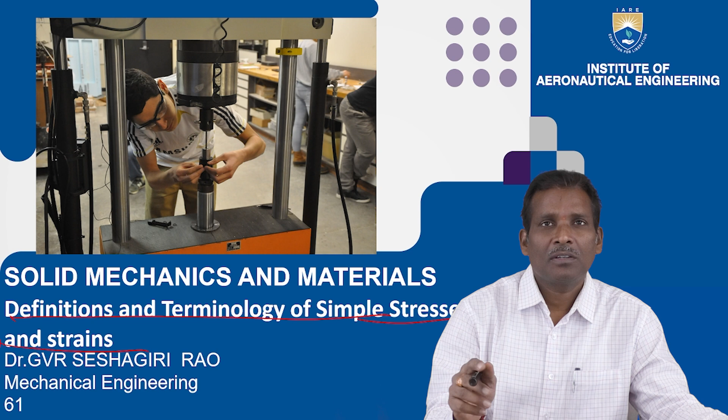In today's session, I want to discuss definitions and terminology. Some important definitions are important in every module, and some terminology related to topics are very, very important. So in this session, I want to discuss definitions and terminology of simple stresses and strains. First we will start from simple stresses and strains, then we will see other definitions and terminology of various topics. These definitions and terminology are very important while solving problems and deriving equations, so every student should know about them.

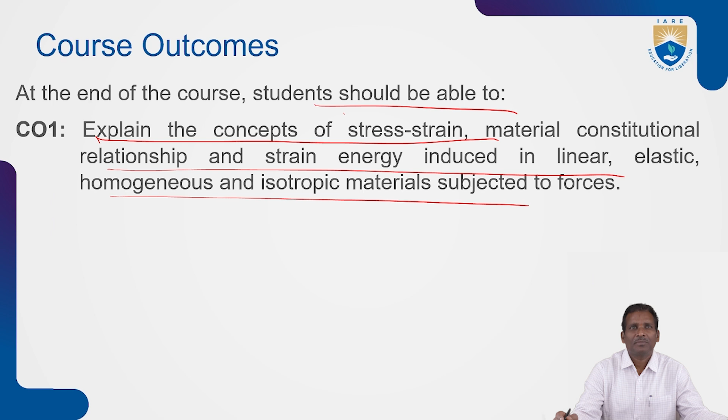So the course outcome is: at the end of the course, students should be able to explain the concepts of stress and strain, material constitutive relationships, and strain energy induced in linear, elastic, homogeneous, and isotropic materials subjected to forces. We have already covered all these topics. So after completion of this definition and terminology module, the student should be able to explain the concepts of stress and strain, and also the relationship related to strain energy induced in such materials.

See, first we will start from stress and strain. So define stress and strain - what do you mean by stress, what do you mean by strain? Later we will see the types of stresses and what is the relation between stress and strain, and how to write the relationship between elastic constants.

When an external force acts on a body, the body tends to undergo some deformation. Whenever the external force is acting on a body, the body tends to undergo some deformation due to this external load. Internally, the cohesion property between the molecules will be developed, so the body resists this deformation. This resistance by which the material of the body opposes the deformation is known as the strength of material - it can withstand that load, meaning the body opposes the deformation.

Within the elastic stage, the resisting force equals the applied load. This resisting force per unit area is called stress, or intensity of stress. So stress is equal to the applied load, that is force per unit area - resisting force upon area gives stress.

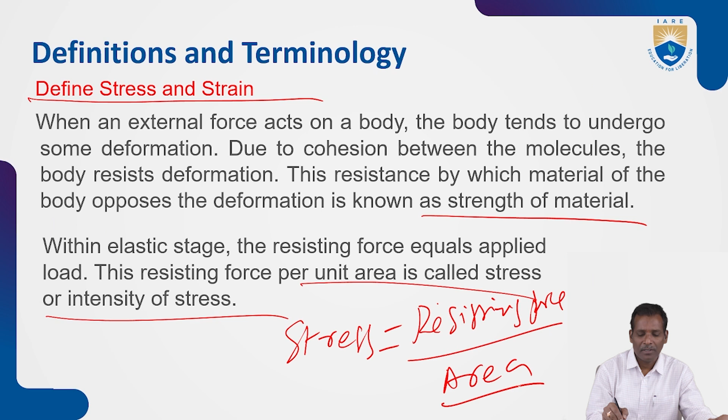So direct or normal stress is calculated using the following formula. You already know the applied load and original cross-sectional area resisting the force - that is called stress. Stress is equal to load upon A. So direct or normal stress can be calculated using this equation, load per area. Now let's calculate the units.

In SI units, force is expressed in newtons and area is expressed in meter square. Hence the unit of stress becomes Newton per meter square, because stress equals load per area. So load is in Newton, and area is in meter square or millimeter square, giving the unit as Newton per meter square or Newton per mm square.

Now you can write the units in pascals. 1 pascal is 1 Newton per meter square, and in centimeter square it becomes 10 to the power minus 4, or 10 to the minus 6 Newton per mm square. 1 megapascal is equal to 1 Newton per mm square. These are the very fundamental definitions of stress and its units. 1 megapascal, that is 1 into 10 to the power 6 Newton per meter square, is equal to 1 Newton - converting into mm square gives 1 Newton per mm square.

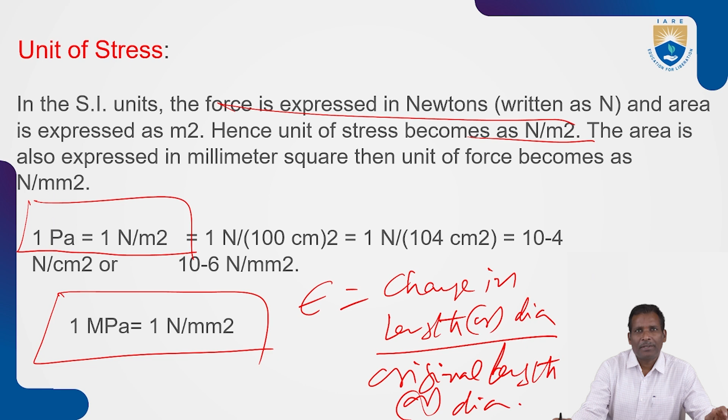Now let's differentiate tensile stress and tensile strain. The stress induced in a body when subjected to two equal and opposite pulls, as a result of which there is an increase in length, is known as tensile stress. The tensile stress acts normal to the area and it pulls on the area.

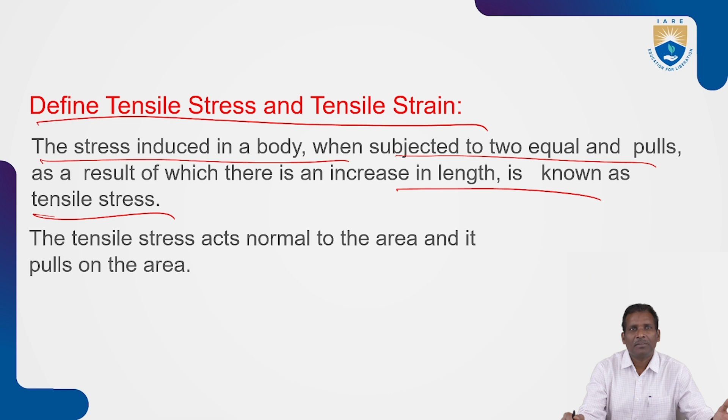See, whenever the component is subjected to tensile load, the load elongates the component. So this is after increased length - original length is L, and the increased length is delta L. So now you can write the strain equation: strain is equal to change in length by original length.

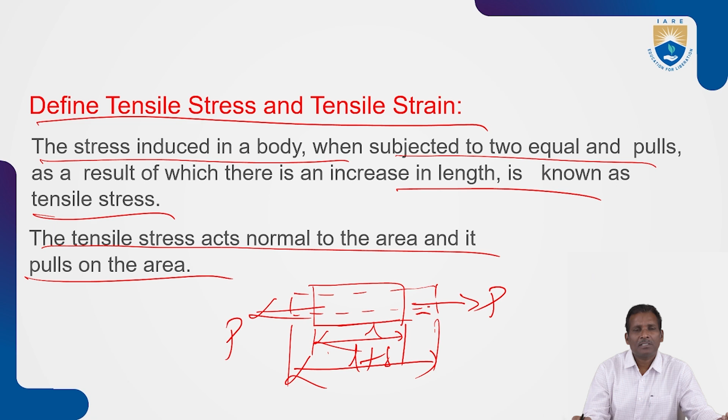See in this diagram, figure shown clearly. Resisting force - whenever the component is subject to tensile load P, some resisting force opposes. That is the strength of the material. Resisting force upon cross-sectional area gives tensile stress. So you can write stress is equal to load upon area.

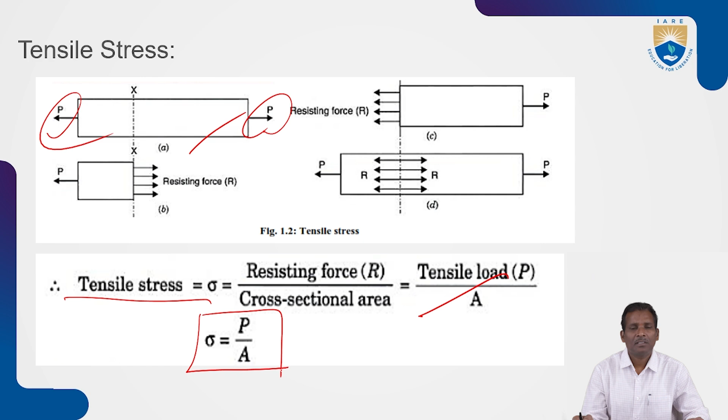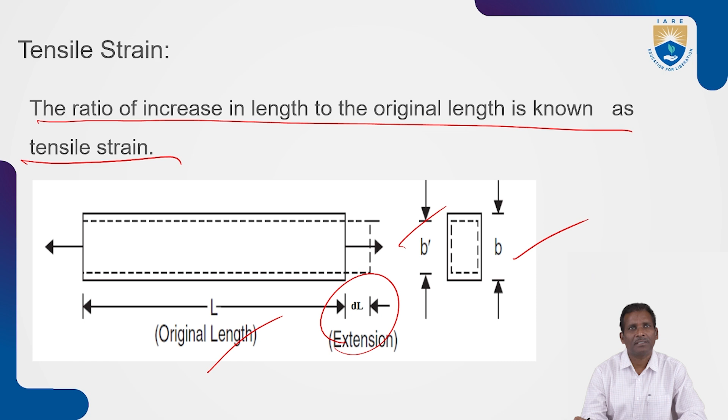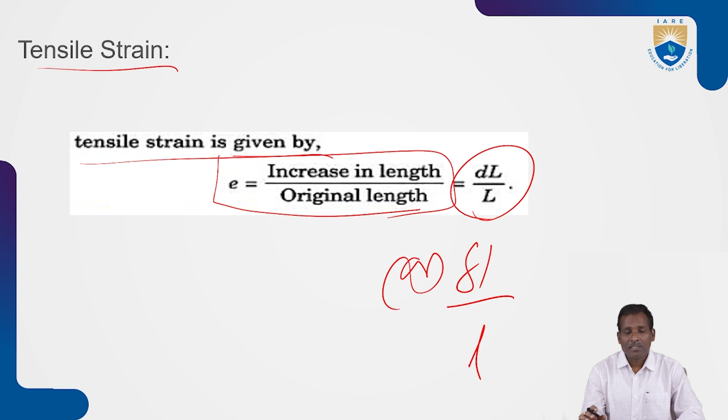So the ratio of increase in length to the original length is known as tensile strain. The original length is L, after deformation it is delta L or dL. Here also the width and depth change to B dash. So length increased and diameter decreased. Now tensile strain, you can write epsilon or E: increase in length by original length, that is dl by L or delta L by L. This is the definition of tensile stress and strain.

Next, what do you mean by compressive stress? The stress induced in a body when subjected to two equal and opposite forces, because of which there is a decrease in length of the body, is known as compressive stress. So the compressive stress acts normal to the area and it pushes on the area.

This is shown in this diagram. Two equal and opposite forces push, because of which there is a decrease in length of the body. So resistance is induced, shown here as the compressive stress. So you can write compressive stress is equal to compressive force by area. Sigma is equal to PC by area, compressive force by area.

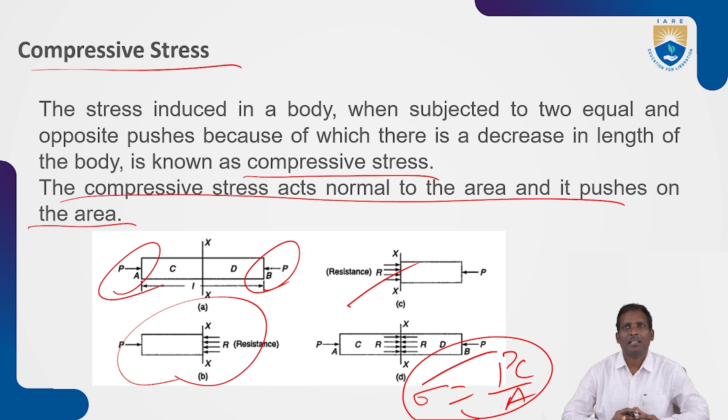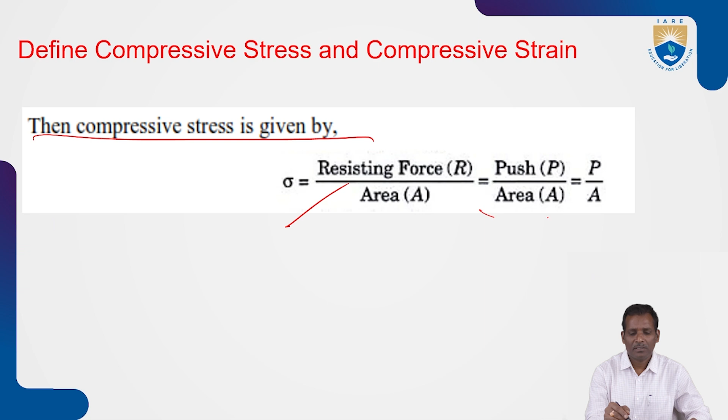So now define compressive stress and compressive strain. Compressive stress we have already discussed - whenever the stress is induced in a body subjected to two equal and opposite pushing forces, there is a decrease in length, not increase, unlike the tensile case where there is increase. So compressive stress is given by resisting force upon area, that is the push load by area.

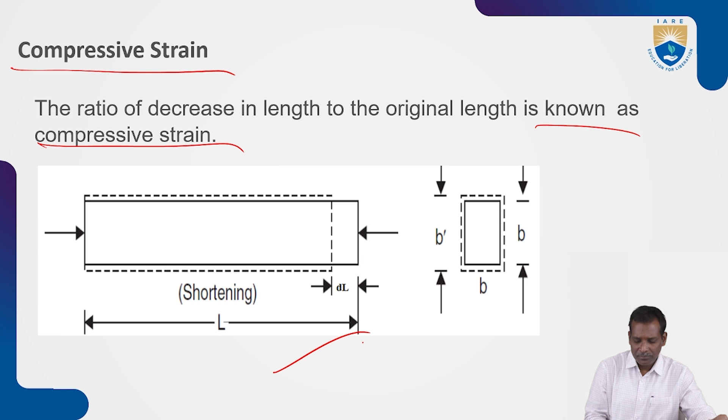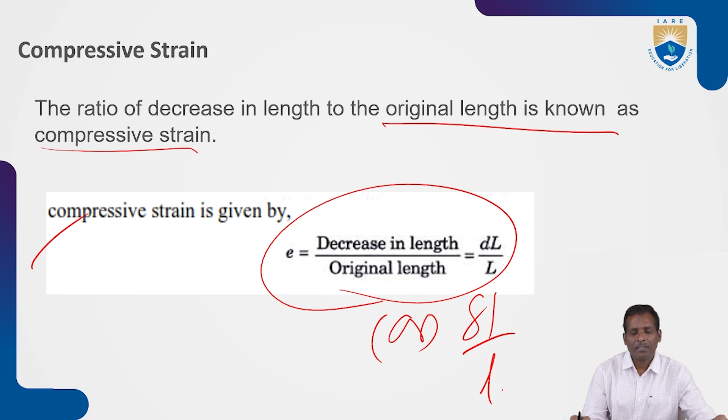So now the compressive strain: the ratio of decrease in length to the original length is known as compressive strain. The original length is L and the decrease in length is dl, the shortening. Write down the equation - the ratio of decrease in length to the original length is known as compressive strain, you can write decrease in length by original length: dl by L or delta L by L.

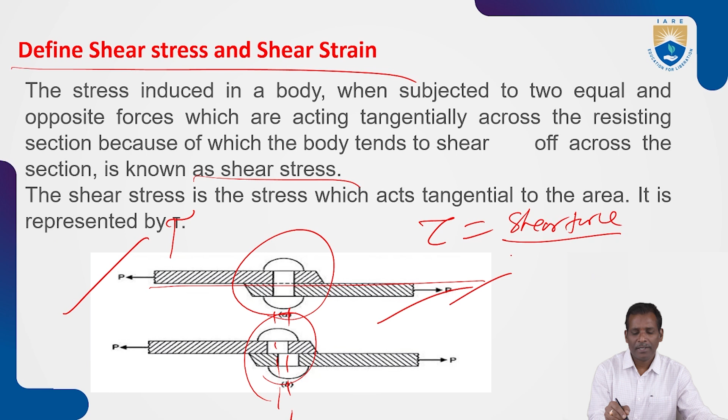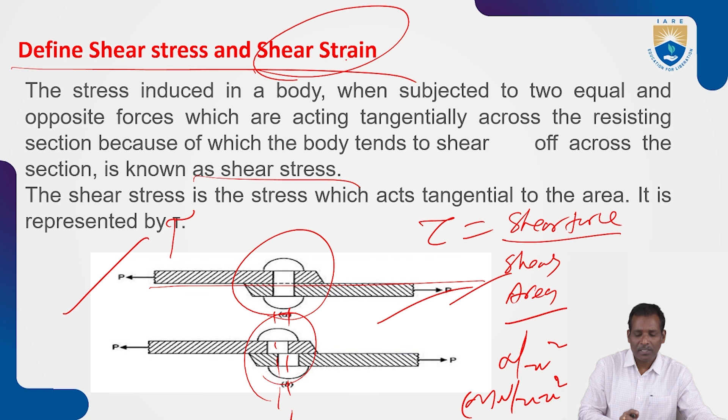So always the shear stress acts tangential to the area. It is represented by tau, shear stress equals shear force by shear area. Units are same, Newton per meter square or Newton per mm square. Now next, define the shear stress, shown in this diagram: shear resistance force upon shear area.

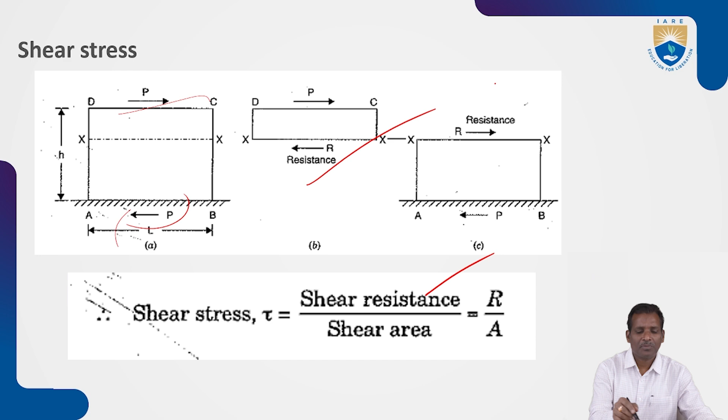So whenever the force is acting tangentially, resistance force will be induced. That resistance stress is called shear stress. So shear strain is a measure of the angle through which a body is deformed by the applied force, denoted by phi. The shear strain is represented by the angle through which the other faces have rotated.

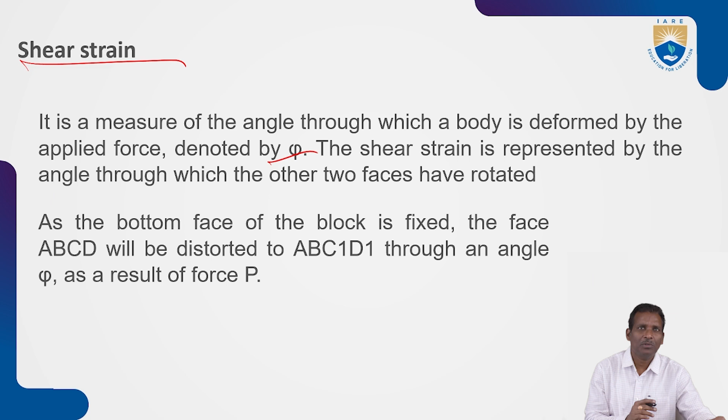As the bottom face of the block is fixed, the face ABCD will be distorted to ABC1D1 through an angle as a result of force P. The bottom one is fixed. ABCD is before deformation, after deformation it becomes ABC dash D dash, or ABC1D1, through an angle phi or theta as a result of force.

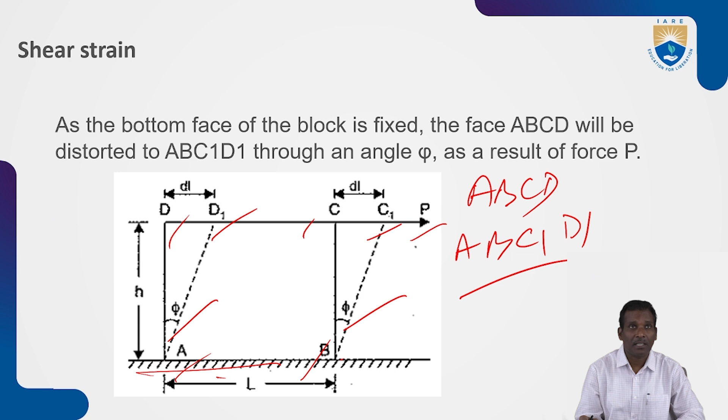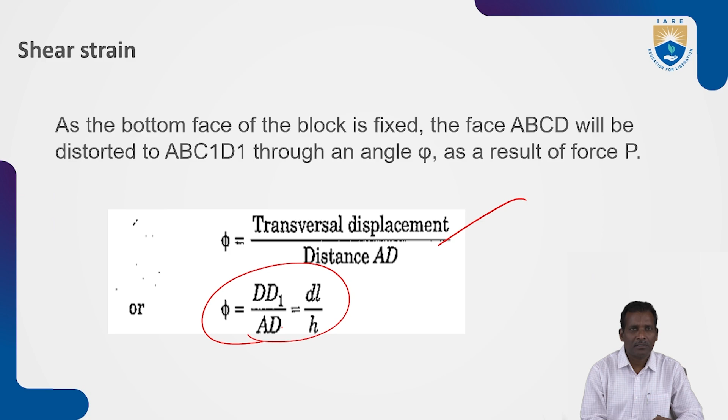So it means whenever tangential force is acting, the ABCD object plane's bottom face is fixed and it distorts to ABC1D1 as a result of force P. That is shear stress, and the deflected angle is the shear strain. So now you can write the shear strain angle as transversal displacement upon distance AD - in this diagram, dl by h, or dd1 by ad.

So now define linear strain - what is this linear strain and lateral strain? The ratio of axial deformation to the original length of the body is known as longitudinal strain or linear strain. When a body is subjected to an axial tensile load, there is an increase in length of the body, as already told in the previous case of tensile stress. Length will be increased.

What are the other dimensions? Diameter. So the body has axial deformation and also deformation at right angles to the line of action of the load - lateral deformation. One is linear deformation where length increases, and in lateral deformation, diameter decreases.

Sorry, diameter - so length increased and diameter decreased, shortened. The ratio of axial deformation to the original length is called linear strain. As shown in this figure, L is the previous length, and after deformation it becomes L plus delta L. So let L be the length of the body, P is the tensile force acting on the body, and delta L is the increase in length of the body in the direction of P.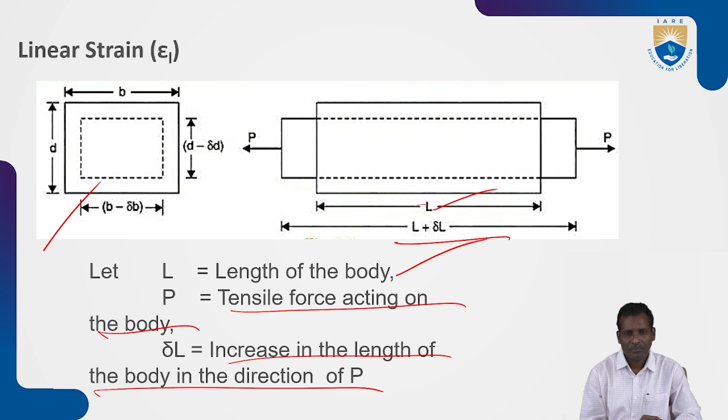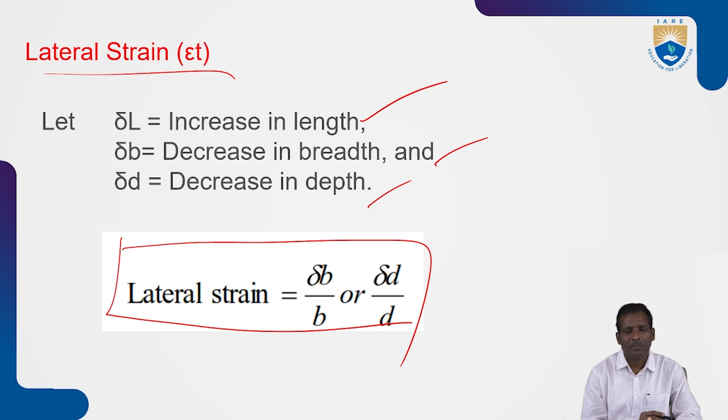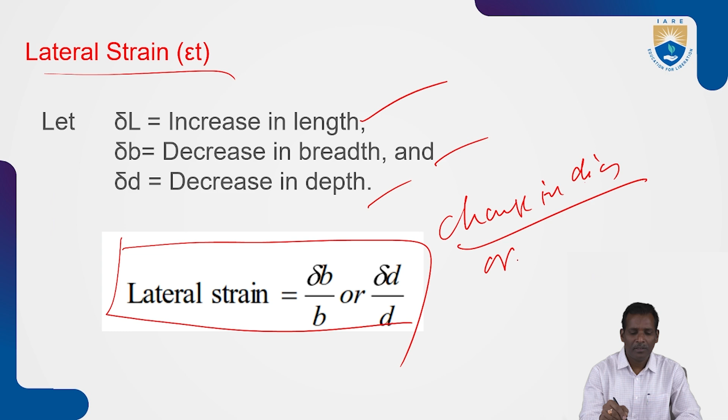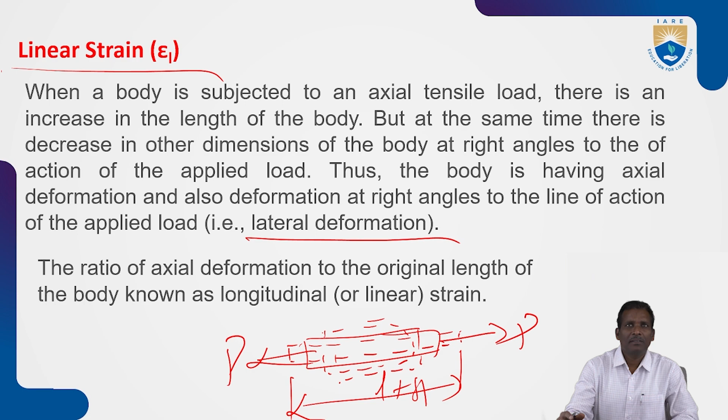Here the diagram shows D and D minus delta D, the width also changes to B minus delta B. Now, lateral strain: delta L is increase in length, delta B is decrease in breadth, and delta D is decrease in depth as shown in the figure. The lateral strain is delta B upon B, or delta D by D - the change in diameter upon the original diameter. So the other dimensions of the body will change at right angles to the action of the applied load.

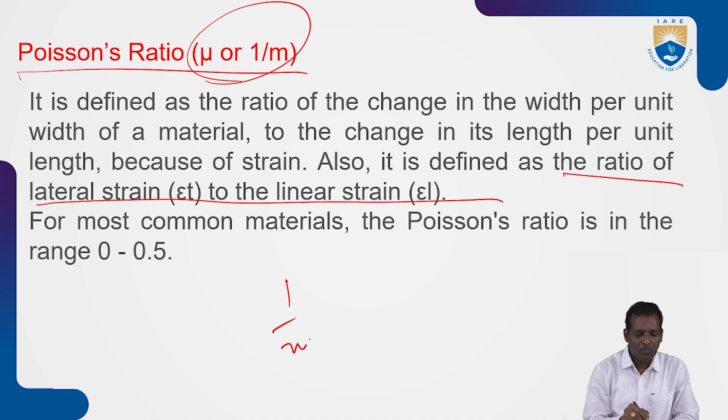So the Poisson's ratio, mu or 1 by m - what is this? You know the lateral strain and linear strain. It is defined as the ratio of lateral strain to linear strain. 1 by m, or mu, is equal to epsilon t by epsilon L - the lateral strain to the linear strain. For most common materials, the Poisson's ratio is in the range 0 to 0.5.

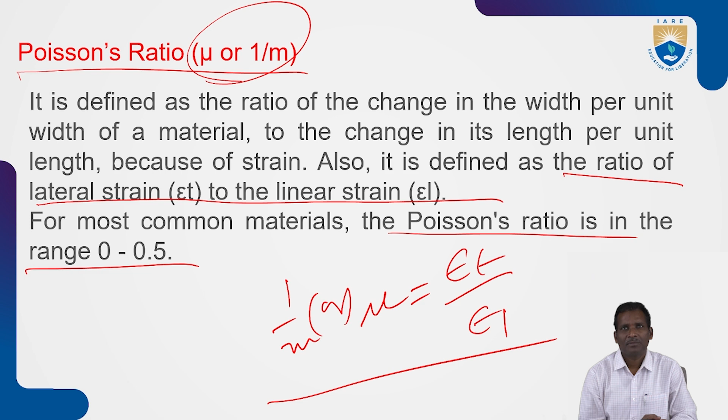It is also defined as the ratio of change in width for unit width of the material to the change in its length for unit length. It also defines the ratio of lateral strain to the linear strain.

Now let's define Hooke's law. What is Hooke's law? This is very, very important in simple stresses and strains. It states that the strain in a solid is proportional to the applied stress within the elastic limit of that solid. As you already know from the stress-strain diagram, stress is directly proportional to strain up to the elastic limit of that solid.

Strain has no units as it is a ratio, and E has the same units as stress - Newton per meter square or mm square. Strain is already defined as change in length by original length. The length dimensions in meter or mm and original length dimensions in meter or mm get cancelled, so it has no units.

Similarly, for elastic materials, the shear strain is found to be proportional to the applied shear stress within the elastic limit. So shear stress is equal to modulus of rigidity multiplied by shear strain. Similarly, you can write sigma is equal to E into epsilon, or E multiplied with strain.

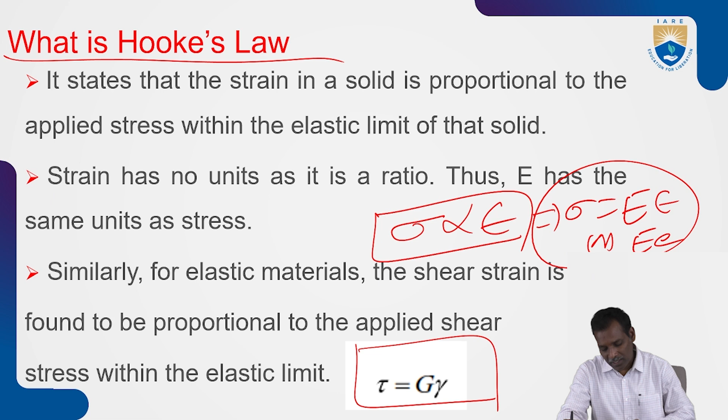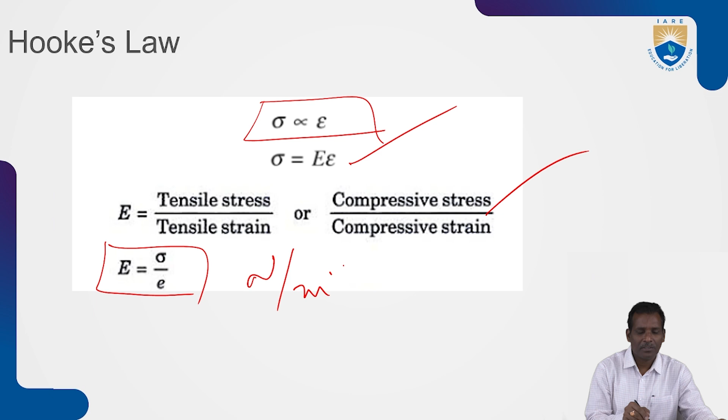So it states that Hooke's law holds good up to the elastic limit - stress is directly proportional to strain. As shown here, stress is directly proportional to strain, and you can also write it in terms of Young's modulus: Young's modulus is equal to tensile stress by tensile strain, or compressive stress by compressive strain. So E is equal to sigma by epsilon, and the units are stress units - Newton per meter square or Newton per mm square.

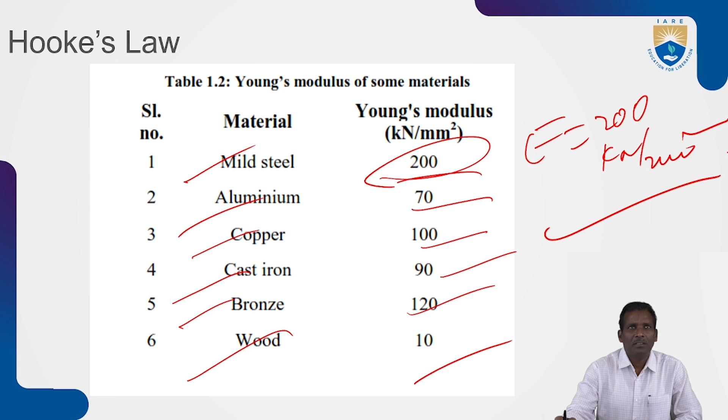Next, extension or shortening of a bar - what is this? Consider a prismatic bar of length L and cross-sectional area A, subjected to axial force P. We have the relation as per Hooke's law, sigma is equal to E into epsilon. Upon substituting E, epsilon and stress in the equation, you will get PL by A into delta L.

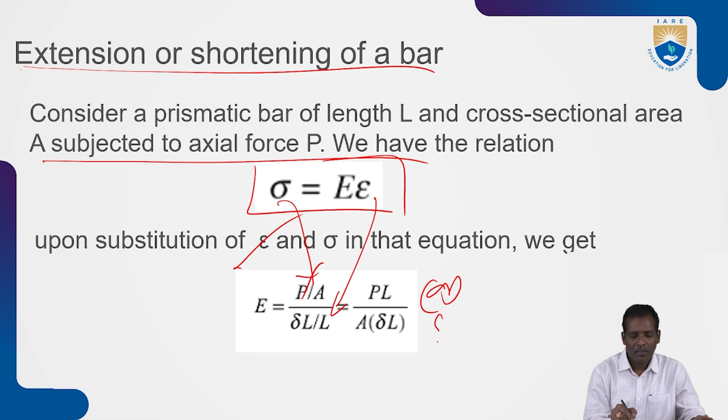So you can write this equation as delta L is equal to PL by A. Stress, as you already know, is Young's modulus equal to P by A... sorry, E is equal to stress by epsilon, and epsilon is equal to delta L by L. So you will get PL by A into delta L, or delta L is equal to PL by AE. This equation for extension or shortening of a bar can be written as delta L is equal to PL by AE.

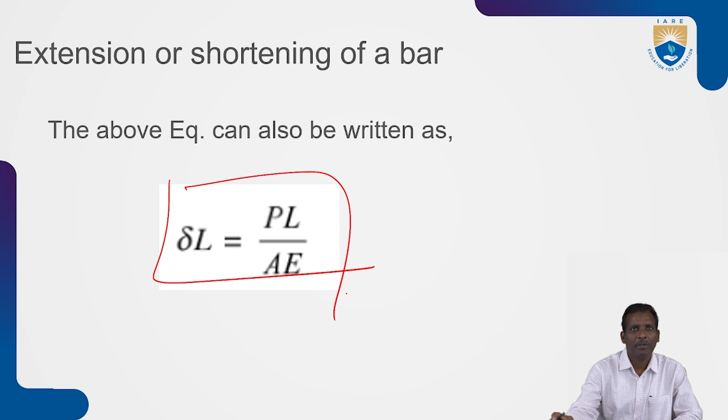Next, let's define factor of safety. It is defined as the ratio of ultimate tensile stress to the working or permissible stress. It may be written as ultimate strength by working stress for brittle materials, and yield strength by working stress for ductile materials. So the factor of safety, written as FOS, is equal to ultimate strength by working stress or design stress.

So what is the importance of this factor of safety? To avoid failure. So always for safe design, you should select a good factor of safety value.

Before designing a component, consider ultimate strength. According to the stress strain diagram, this is the maximum strength, meaning the material can withstand this load. Beyond this ultimate strength, the component will fail.

So what is this working stress? It can withstand the maximum value, but in the practical application you are working under stress. So always the working stress is less than the ultimate strength value.

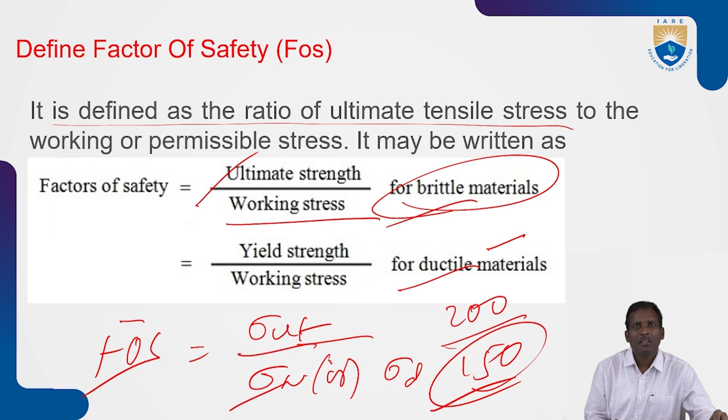So what about ultimate stress for brittle material and ductile material? Ductile material indicates some sign before failure, but brittle material does not give any signature - it suddenly fails, not through plastic deformation.

Next, how to write the relation between E and C. E is the Young's modulus, and C is the modulus of rigidity.

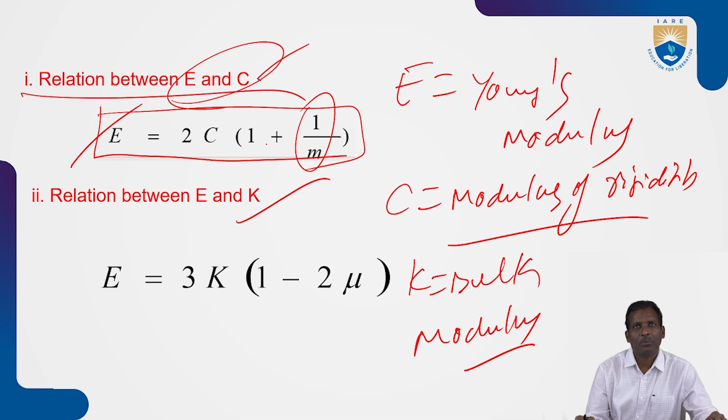Bulk modulus is K. Now write down the equation for the relation between E and C: E is equal to 2C into 1 plus 1 by M. What is M, or 1 by M? That is Poisson's ratio.

So the relation between E and K: E is equal to 3K into 1 minus 2 mu.

Next, define bulk modulus. When a body is subjected to three mutually perpendicular stresses of equal intensity, the ratio of direct stress to the corresponding volumetric strain is known as bulk modulus. It is denoted by K.

So bulk modulus K is equal to sigma divided by delta V by V, the ratio of direct stress to the corresponding volumetric strain. The volumetric strain is change in volume upon original volume - delta V is change in volume, V is original volume.

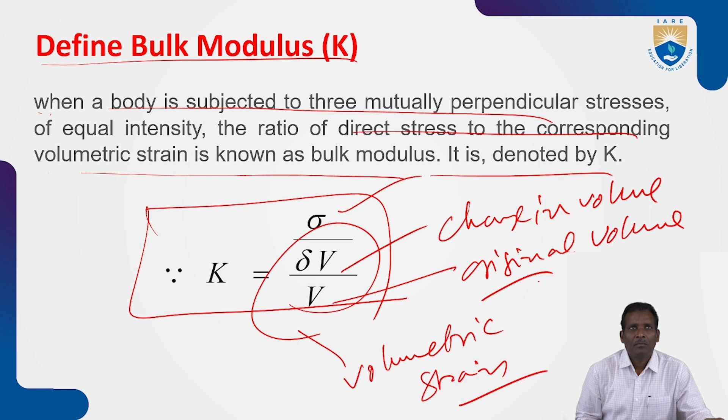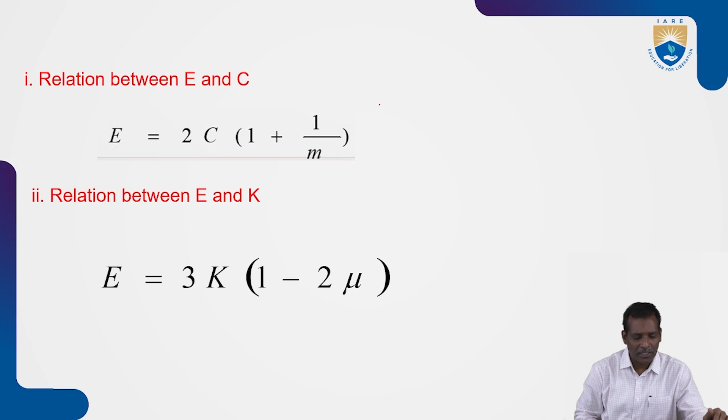Next, the relation between E, C and K. We know that E is equal to 2C into 1 plus mu, as we already saw. Also E is equal to 3K into 1 minus 2 mu. So what is the relation between these three: Young's modulus, modulus of rigidity, and bulk modulus?

So here you know the relations between E and K, and E and C (you can write C or G). Now from equation 1 you can write 1 plus mu is equal to E by 2G.

So mu is equal to E by 2G minus 1. Equating this value, substituting mu in the equation, you will get the relation between E, G (or C), and K.

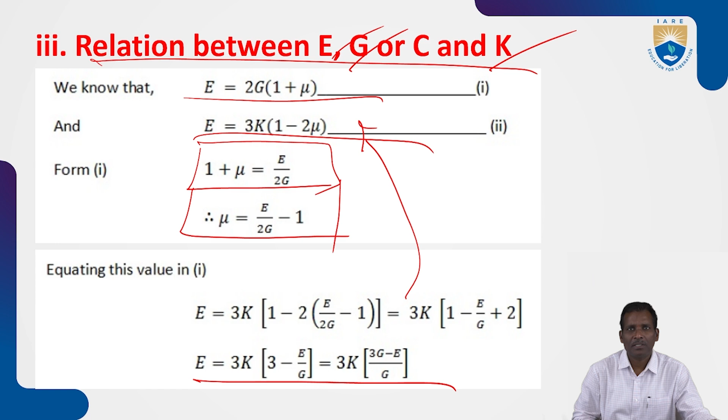3K into 3G minus E by G. After simplification, you will get 9KG by G plus 3K - this is the relation between E, G and K.

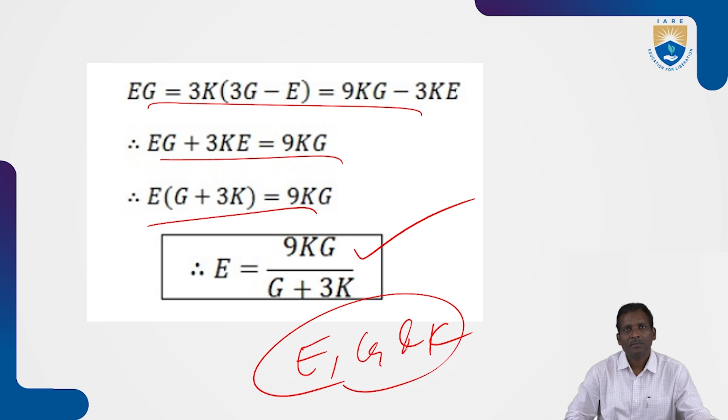Next, define volumetric strain. The strain in the x-axis direction due to stress sigma x: strain is equal to stress upon E, since stress is equal to E into epsilon x as per Hooke's law.

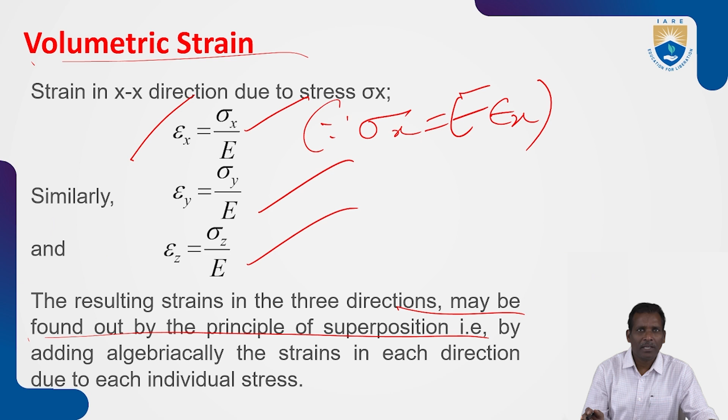Similarly for sigma y and sigma z, the resulting strains in the three directions may be found by the principle of superposition, by adding algebraically the strains in each direction due to each individual stress.

So for volumetric strain, write the equation: sigma x by E minus sigma y by ME minus sigma z by ME, where 1 by M is the Poisson's ratio.

Finally we get 1 by E into sigma x minus sigma y by M minus sigma z by M. Similarly, volumetric strain in the y direction: 1 by E into sigma y minus sigma x by M minus sigma z by M.

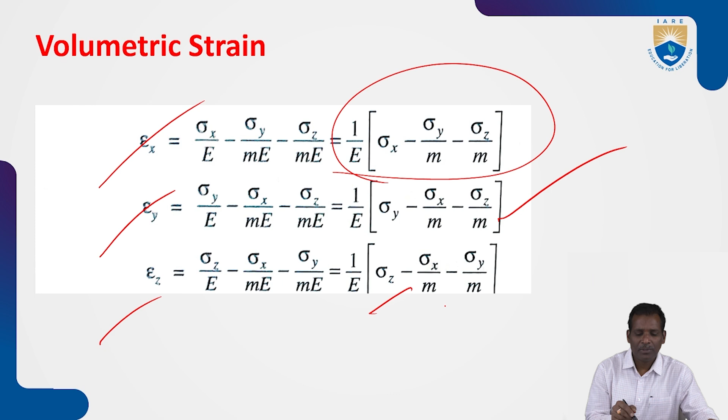In the z direction: sigma z minus sigma x by M minus sigma y by M. Now the volumetric strain delta V by V can be written in terms of the strains in the x, y and z directions.

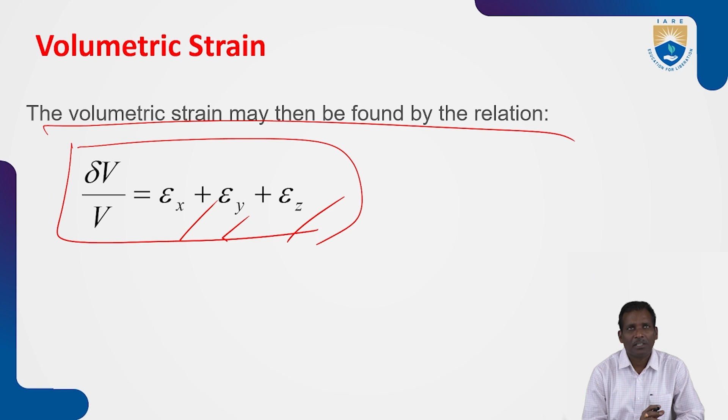So these are the definitions and terminology related to simple stress and strains.

Next, the references I have taken for these definitions and terminology: S. Ramamrutham, Strength of Material, published by Dhanpat Rai. R.K. Rajput, Strength of Materials. R.K. Bansal, Textbook of Strength of Material, Laxmi Publications. And R.S. Khurmi and Gupta, Strength of Material, published by Chand and Co.